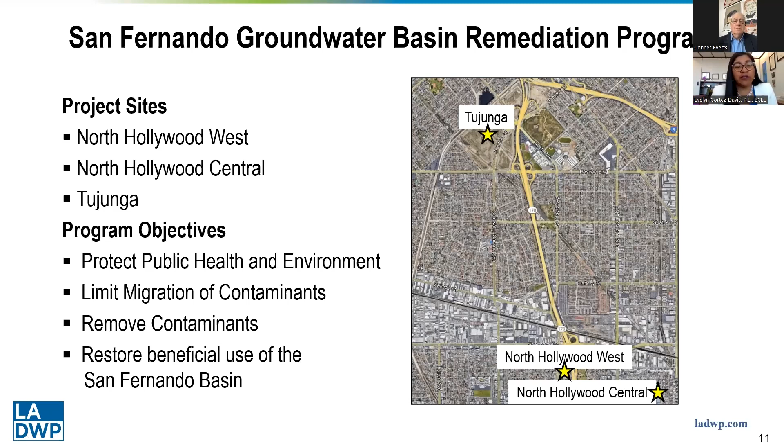But first, before we get going, talking really more about the program objectives in general. There are four. We want to protect public health and the environment, limit migration of contaminants, remove the contaminants from the basin, and what's driving really our program from LADWP's perspective first and foremost is to restore the beneficial use of the San Fernando Basin for the benefit of the city of Los Angeles.

So what are we doing and why is it important? Typically, groundwater has supplied about 10% of our water supply, but in times of severe dry periods, droughts, etc., groundwater has been able to supply up to 21% of our supply. We want to be able to restore this ability.

However, many of our groundwater wells have been, over the past few decades, removed from the ability to pump them reliably, which has been severely constrained because of contamination impacts. We have 115 total groundwater wells here. Just over a third of them can be pumped reliably.

So this is part of a larger strategy for the city of Los Angeles to be more locally reliable. In order for us to do this, groundwater is a key component of that. Recycled water, stormwater capture, and conservation, of course, make up the other pieces of the puzzle, but groundwater is a central cornerstone piece of our water supply strategy in general for the city of Los Angeles.

So we want to be able to restore this access to all the groundwater basins. We're going to be focusing on the San Fernando groundwater basin today, but we do have groundwater rights also in the Central Basin, the West Coast Basin, and a few other smaller basins as well. But the largest adjudication of water rights for us to be able to pump water into the city of Los Angeles system is from the San Fernando groundwater basin. That's what we are focusing on this program today.

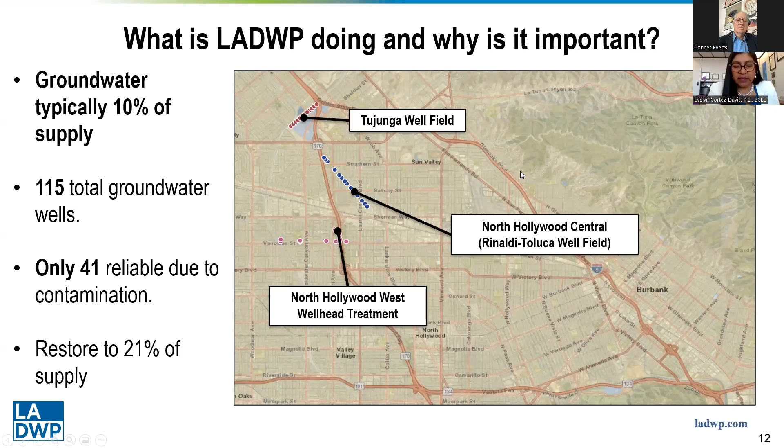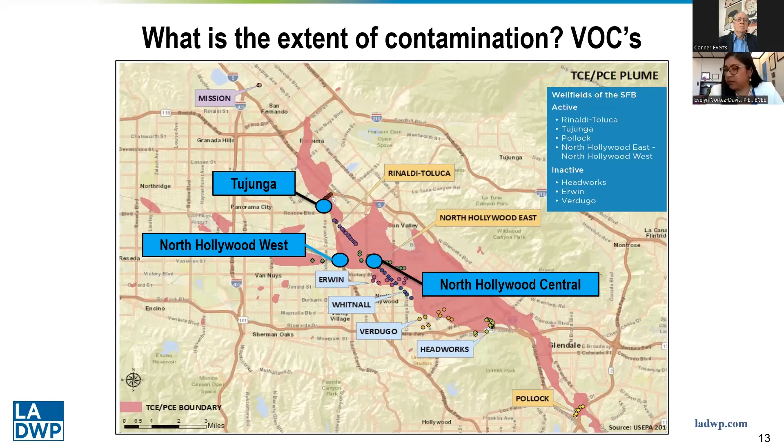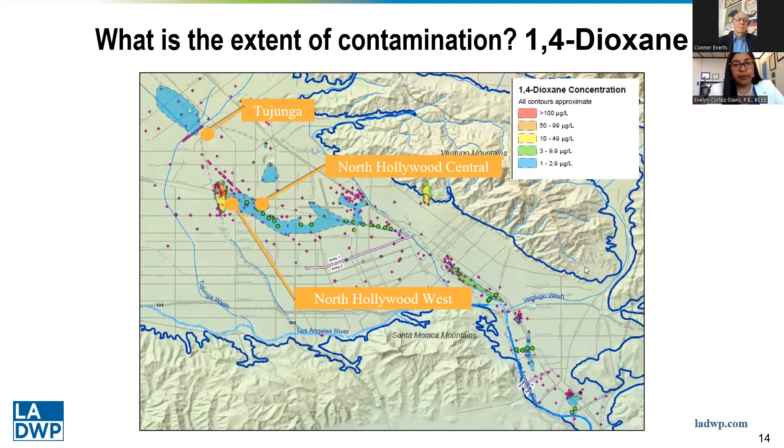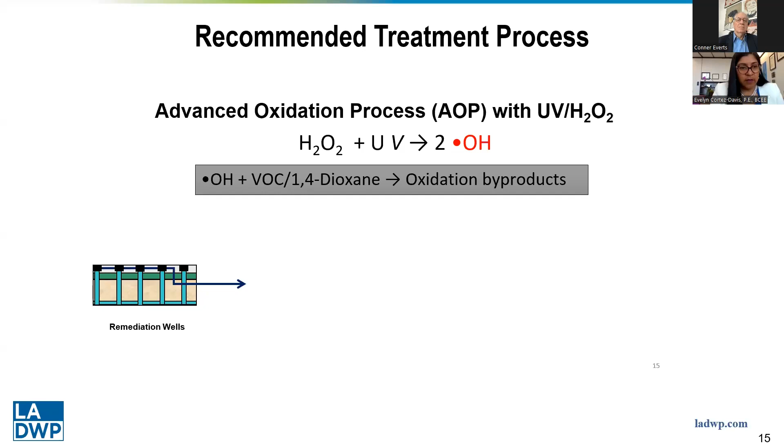Our recommended treatment process is advanced oxidation with ultraviolet light and hydrogen peroxide. I'll walk you through the different pieces here. Groundwater is pumped through the remediation wells and goes through two pre-treatment steps: sand separators and cartridge filters to remove sediment. After pre-treatment, peroxide is injected, and the water with peroxide is then passed through the ultraviolet advanced oxidation process. The ultraviolet light energizes hydroxyl radicals, which basically break apart the bonds in the molecules of the contaminants we're trying to treat.

After the ultraviolet light treatment, the water then goes through granular activated carbon vessels to remove any excess hydrogen peroxide. After that, we have traditional disinfection treatment in order to introduce the water into our distribution system. The GAC vessels do need to be flushed and backwashed every once in a while. When we do, we have a backwash waste tank, which is the next animation here. Thank you, Gary, for your help. The resulting water from the backwash system goes into the sewer.

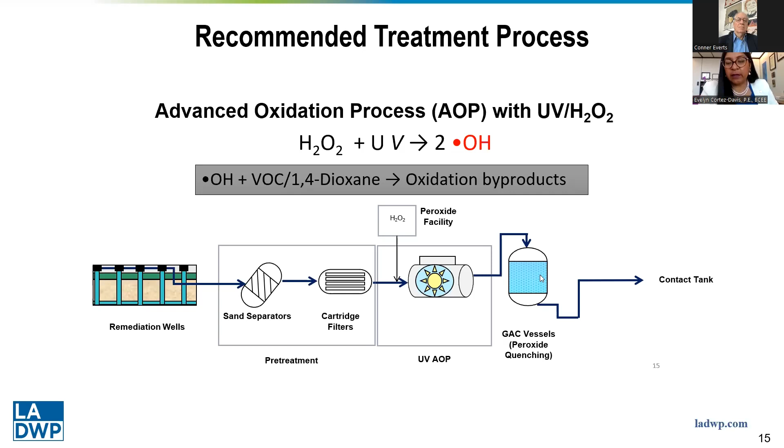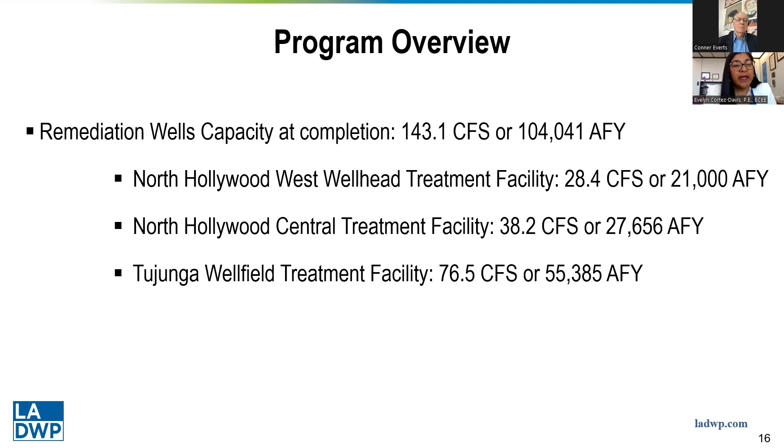All three facilities, as you'll see as I advance, have a similar layout. We'll walk through each one. The capacity of each facility is shown here. At completion, we expect the North Hollywood West treatment facility to have 28 cubic feet per second of capacity, roughly 21,000 acre feet per year. North Hollywood Central is the second largest, at 38 cubic feet per second capacity. And the Tujunga facility is the largest at 76 cubic feet per second.

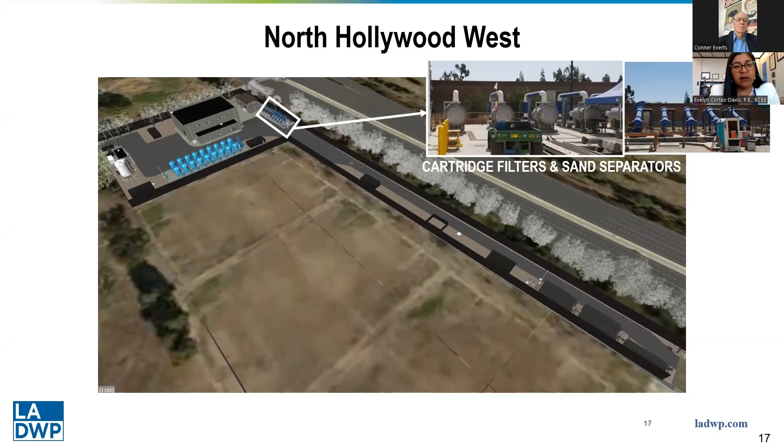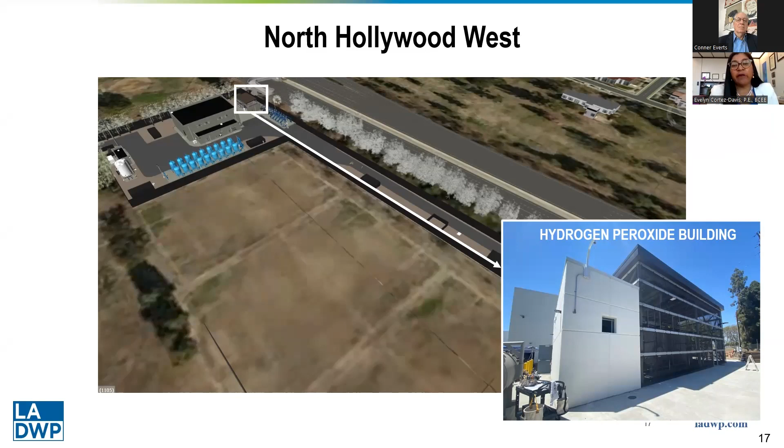The North Hollywood West facility has been constructed by our in-house construction forces and was designed by our owner's agent team, Hazen and Sawyer and Arcadis, also supported by Worley Parsons and other key team members. The facility treats 5 wells on site, adjacent to Whitsett Fields Park in the San Fernando Valley next to the 170 freeway. The water flows as shown in the schematic earlier, first through pretreatment, then through hydrogen peroxide injection, and then through the ultraviolet advanced oxidation process.

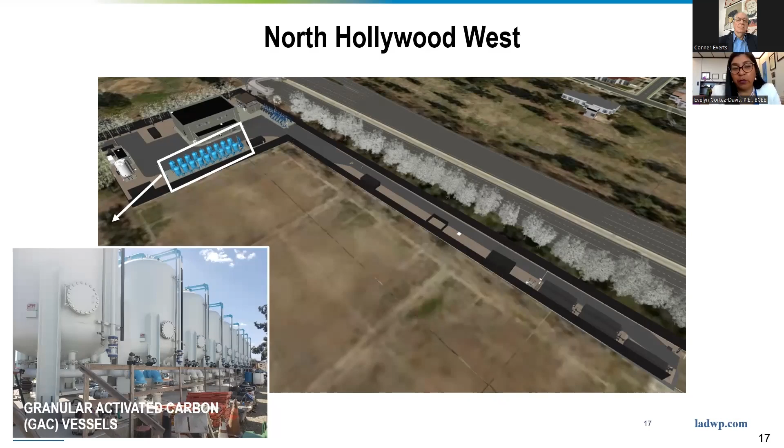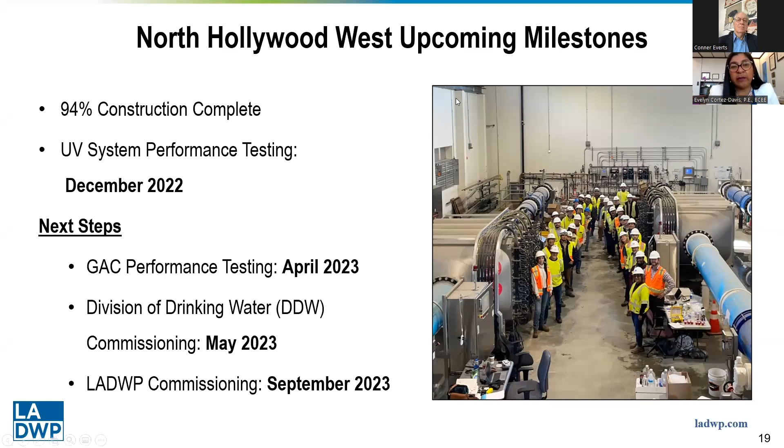We're going to be pumping 3 of the remediation wells in order to focus the plume into the area where we're treating it. After the first 2 years, we expect to treat nearly 21,000 acre feet with an additional 2 wells coming online. The North Hollywood West project is just about 95% complete, a little over 94. The UV system performance testing was done in December. We are doing performance testing soon for the GAC system, the granular activated carbon, and then our commissioning process for the Division of Drinking Water will be starting later this spring, with our DWP commissioning process going in the fall of this year.

To go over the North Hollywood Central Treatment Facility, we again have a similar process for the water. We have strainers for pre-treatment and then an injection of peroxide dosing, and you can see the storage there, some pretty large storage containers for our hydrogen peroxide. Then the water will flow through the UV reactors in the AOP building, and then through the granular activated carbon to remove excess peroxide.

Then there's ammonia and fluoridation that's taking place also on site. The reactors at this facility are some of the largest of their kind, 384 UV lamps per reactor, and we have 5 reactors at this facility. So it's a fairly extensive system that we have at the North Hollywood Central Treatment Facility.

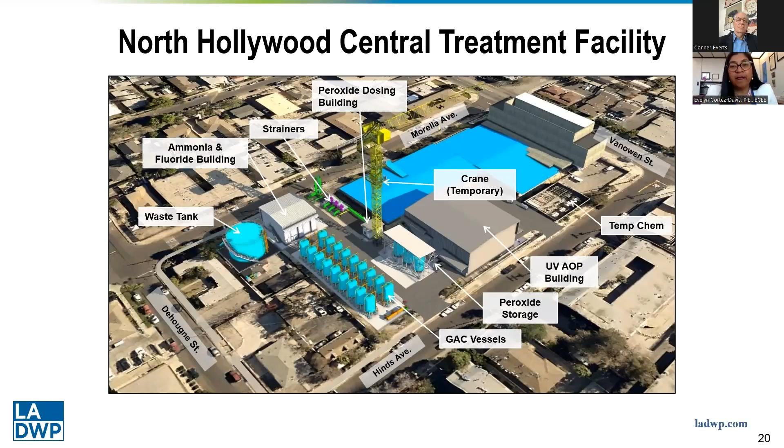This is an aerial photo of what the facility looks like. In contrast to our North Hollywood West, as you can tell, it's an extremely high density residential area. These are multifamily homes around the perimeter of the facility. So it has constraints that some of the other sites do not, and it has challenged our engineering and construction teams to do a lot in a smaller footprint where we don't have as much room to go.

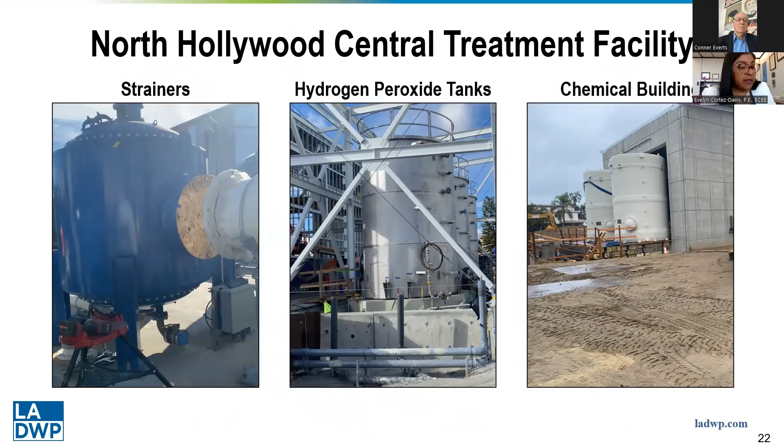But all of the components have been successfully put in, and this facility is making extremely good progress toward completion later this year. What you would see if you were standing on the ground here are the self-cleaning strainers used to remove larger particles, sediment, and debris from the extraction of the groundwater. Then we have the 3 hydrogen peroxide tanks, each 13,000 gallons, and the chemical building that will store ammonia and fluoride for disinfection after the water has gone through the groundwater treatment process.

Upcoming milestones: the construction will be complete. We are targeting to finish construction later this year. We're about 90% now, 89%. Next steps will be performance testing and the commissioning process in the spring with DDW, and our DWP commissioning process for the latter part of this year.

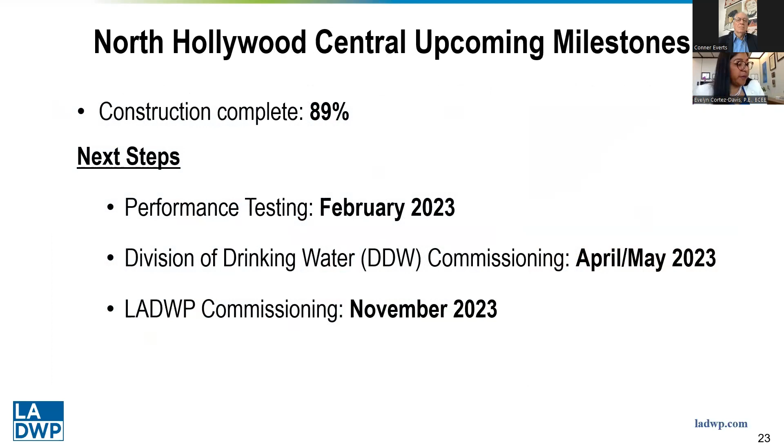For the Tujunga Wellfield Treatment Facility, we have a number of existing facilities that we needed to work around, but a little bit larger footprint for this facility. This treatment facility will treat water from 9 out of the 12 wells at the Tujunga Wellfield, which is located at the same location. Water from wells 6 to 12 will go through the pre-treatment and peroxide dosing like the other facilities.

Then go through the UV reactors as well, and through the granular activated carbon for removal of excess peroxide. There are 2 wells here that will only go through granular activated carbon, and the reason is that they are not affected by the 1,4-dioxane plume that does affect this particular area.

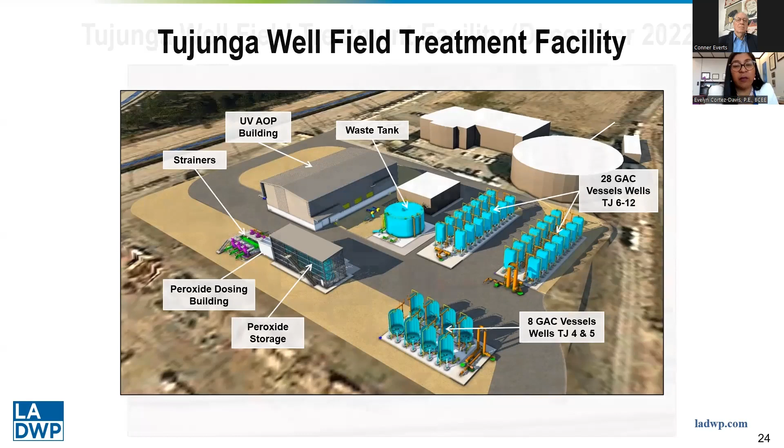I did not mention for North Hollywood West that the controlling contaminant is 1,4-dioxane. For this facility, the controlling contaminants are VOCs, PCE and TCE. So here's an aerial photo showing the progress, and it's a fairly large construction site.

We are adjacent to the Tujunga spreading ground. If you've been to the Tujunga area, you may have noticed that recently they have had water in there. It's a very critical facility for us because it plays a number of different roles.

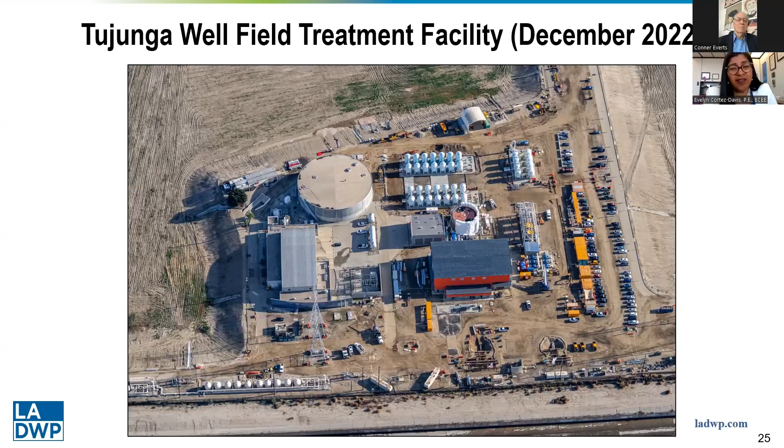It is a wellfield. It is a functioning stormwater spreading basin. It is a pumping station into the distribution system, and now, as of the completion of this project, it will also be a groundwater treatment facility. So 4 critical roles, and we'll be able to restore some of the access to the wells that have been affected by contamination.

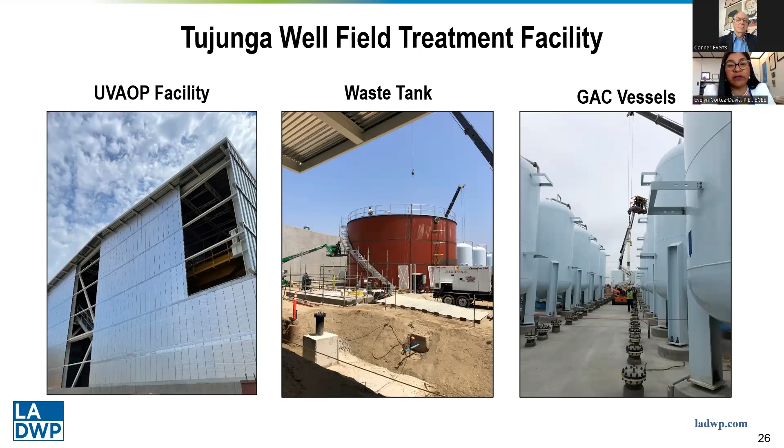So program schedule - we have been working on this program for quite some time. The owner's agent contract, in fact, we awarded back in 2015, and Hazen and Sawyer was brought on board to help us as our expert. North Hollywood West construction is being completed by our in-house construction team. DWP started in September of 2017.

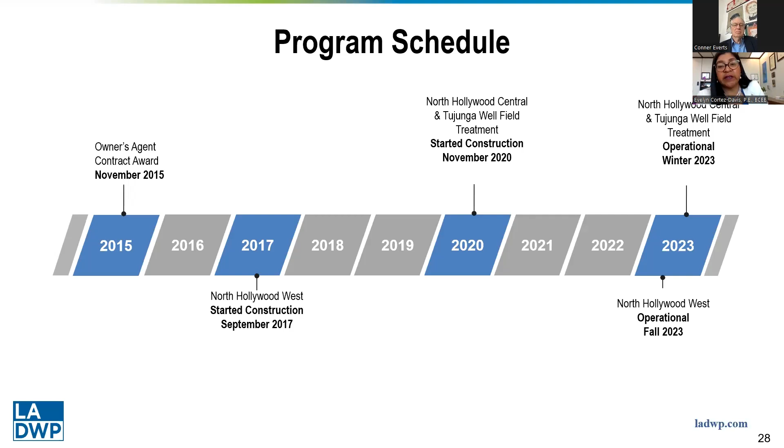The North Hollywood Central and Tujunga Wellfield project began construction in November 2020, but that team was brought on board sooner so they could start the design build process. It was being delivered through a progressive design build process, and the team helping us is Kiewit as the construction contractor, and Stantec as our design consultant. For North Hollywood Central and Tujunga Wellfield, we are targeting to be operational this winter, and fall of 2023 for North Hollywood West.

Let's talk about money, because none of this is free. The program cost is significant. Totaling all three facilities, the cost is $640 million, and $308 million is the Prop 1 grant funding secured for this program. So far, we have already been reimbursed $74 million.

The importance of the Prop 1 funding cannot be overstated. Every dollar secured through Prop 1 will offset ratepayer investment. Anything else not covered by Prop 1, our intent is to make sure we are proceeding forward in a way that preserves our ability to recover costs from potentially responsible parties in the future.

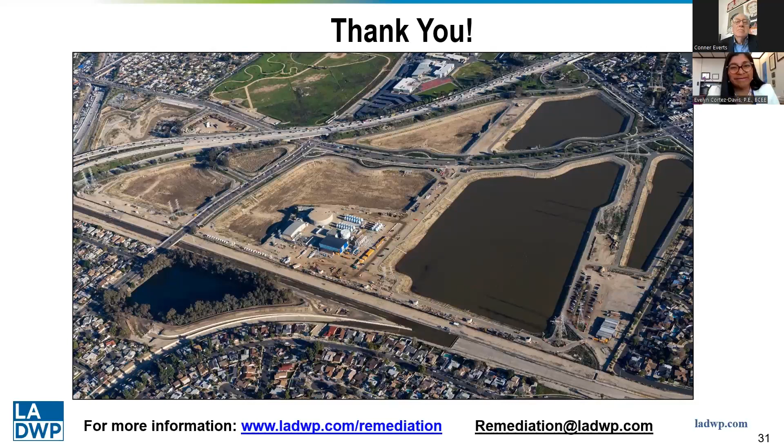Thank you, Evelyn. I'm sure that's already brought up some questions, and thank you for all of the updates and information. I know it's a long-running project. So next we have Rob Katherman from the Water Replenishment District. Take it away, Rob. Yeah, Conner, thank you. And Evelyn, great job - it's really nice to see young women involved in engineering projects. We've worked with you for the last several years on our Hyperion planning, and it's been a real pleasure.

Water Replenishment District - we manage groundwater for 420 square miles. We have utilized reclaimed water for replenishment. Two years after we started, today nearly all of our replenishment is basically reclaimed sewage. So our motto is: the future of groundwater is purified poop water. Let's go next.

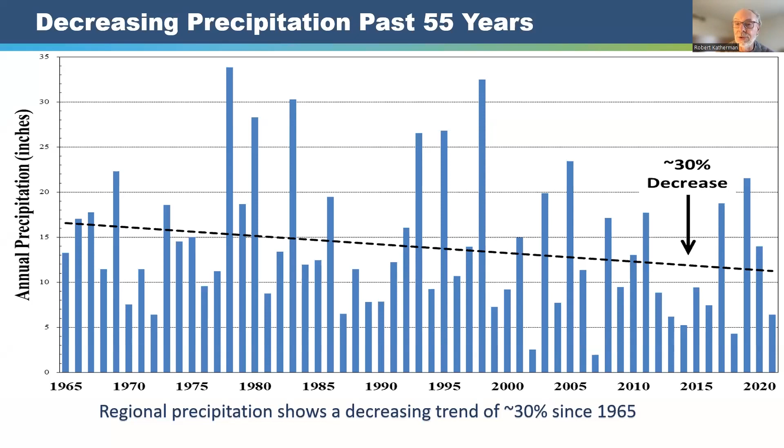Climate change - we've all heard about it. We recognized the effect of climate change over 50 years ago, and in particular 20 years ago. Metropolitan produced this slide showing we have had a 30% reduction of precipitation here in our basins over the last half century. So, new rules.

Climate change was causing drought as our new normal. We've had the driest 20 years in the last 1,000 years, as you all know. So the short-term solution is water conservation, something we can all do on a daily basis. Long term, purified poop water from local sources.

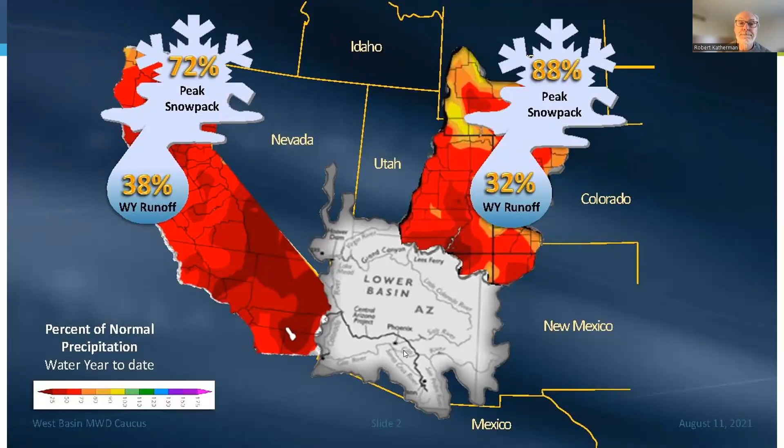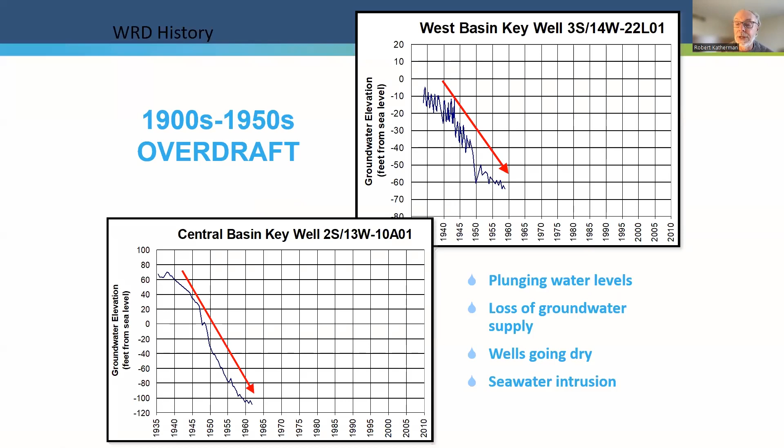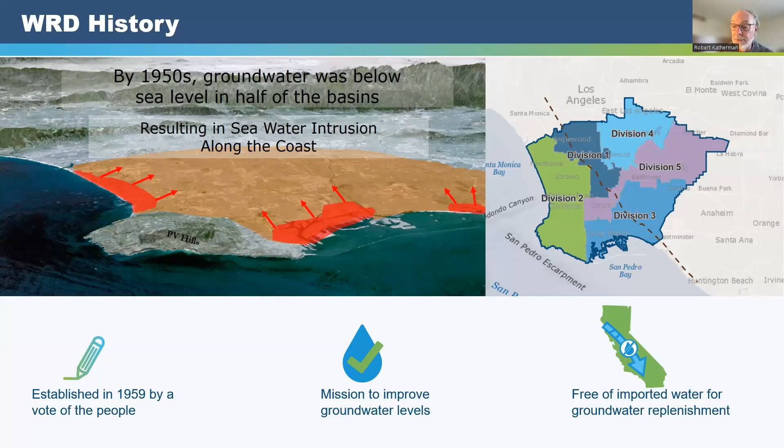So WRD was established in 1959 by a vote of the people to pay for replenishment water, which was originally 100% imported water. So back after World War II, the leaders in the South Bay decided we need to do something about this seawater intrusion. First was to create the West Basin Municipal Water District by a vote to tax themselves, almost 13%, believe it or not, to be able to buy imported water to supplement groundwater.

Next, we filed a judgment to cap the amount of pumping that was concluded after almost a decade of litigation, and cap pumping at a little over 280,000 acre feet. That is more than the basin can replenish. That is about 100% more than the safe yield of the basin. So how do you make up that other 50% of the water that's being pumped? So that's where WRD came into being.

In order to combat the seawater intrusion, the County Flood Control built 16 miles of injection wells along the West Coast to inject imported fresh water to stop seawater intrusion, and about 70% of that water ends up migrating inland to replenish the West Basin. Subsequently, they built the seawater barriers along the two ports, what we call the Dominguez Gap barrier, and then on the east part of Long Beach and west part of Orange County for the Alamitos barrier. So as I said, WRD was formed in 1959, again by a vote, to replenish our aquifers and to protect groundwater quality.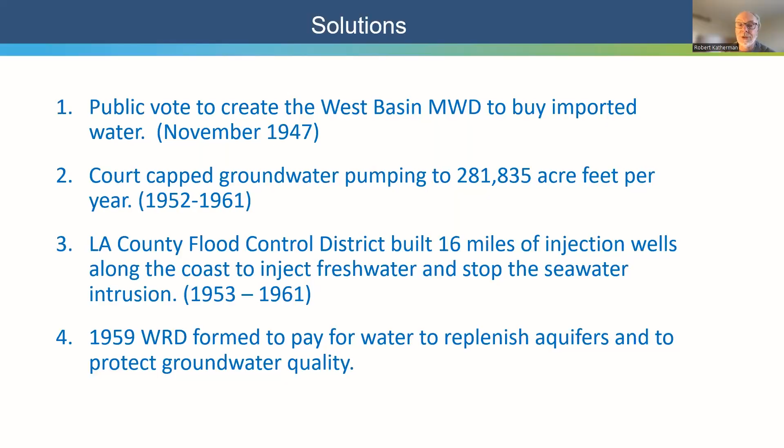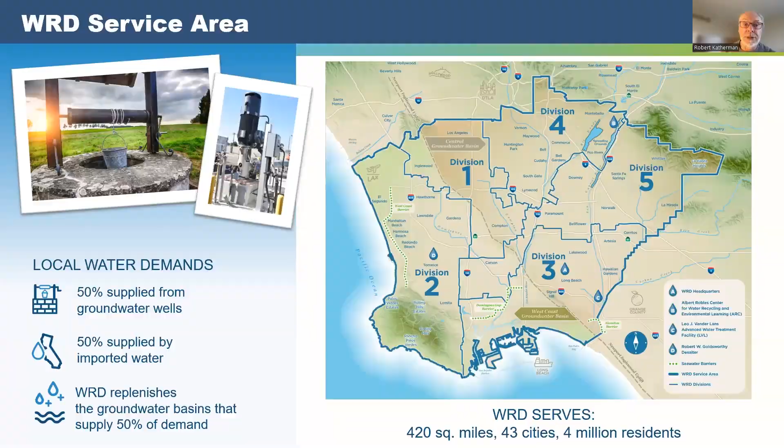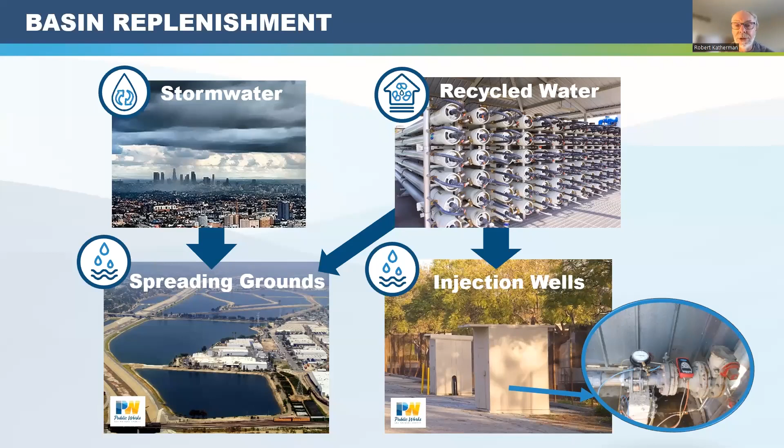So our sources of water: stormwater capture and recycled water into the spreading grounds, and now recycled water into injection wells at our three barriers. And we have just built our first inland injection well over in Long Beach. We'll be using water from our Vander Lans Advanced Treated Water Plant.

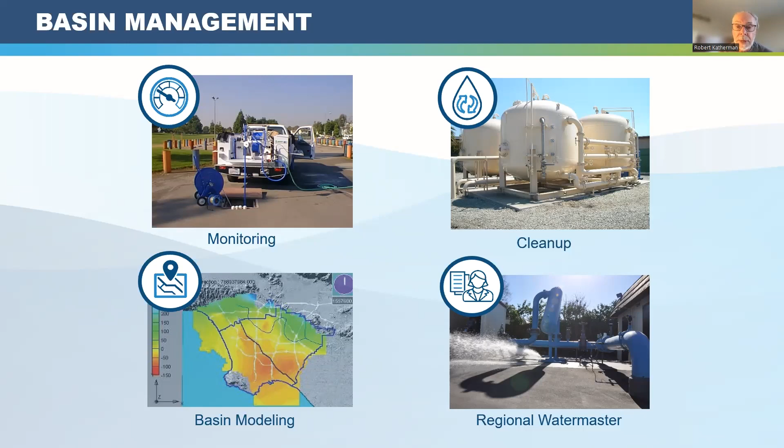So our job to manage the basin, of course, is to monitor groundwater and to check for chemicals. So we test for over 200 chemicals now in all of our wells, and we have 300 locations throughout the basin. And in our basins, we are more fortunate than the San Fernando Valley. The valley, as is the San Gabriel Valley, are basically big sand pits. So whatever contamination enters at the surface goes directly into the aquifer. We have layers of aquifer interspersed with clay, aquitards they call them, where the water from the surface cannot percolate directly into the aquifer. And I'll show you that in a minute. We'll move on.

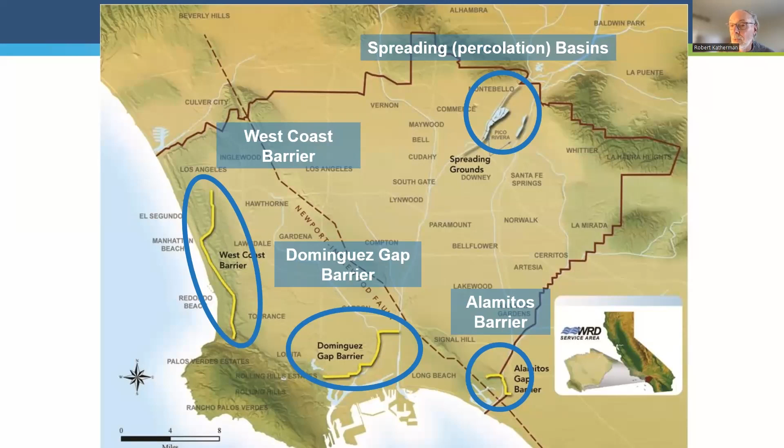Yeah, so our three sources of replenishment are the barriers, West Coast, Dominguez Gap, and Alamitos. We provide about 30,000 acre feet of water into those barriers, but the majority of our water is spread in the percolation basins, which are the San Gabriel and Rio Hondo rivers as they come through the San Gabriel Mountains, and at Montebello, 605 and 60 freeway, if you can visualize that. Over 100,000 acre feet is produced there. Half of that is normally stormwater. The other half, when we started, was all imported water. Today, that's all reclaimed water from the county sanitation district plant.

2004, fast forward, as the district had worked over the years to gradually reduce imported water and increase recycled water and capture stormwater. We said we recognize the effects of seawater intrusion and climate change as threatening our basin. So we said we need to start pushing this quicker. And so we started the Water Independence Now to eliminate our need for imported water.

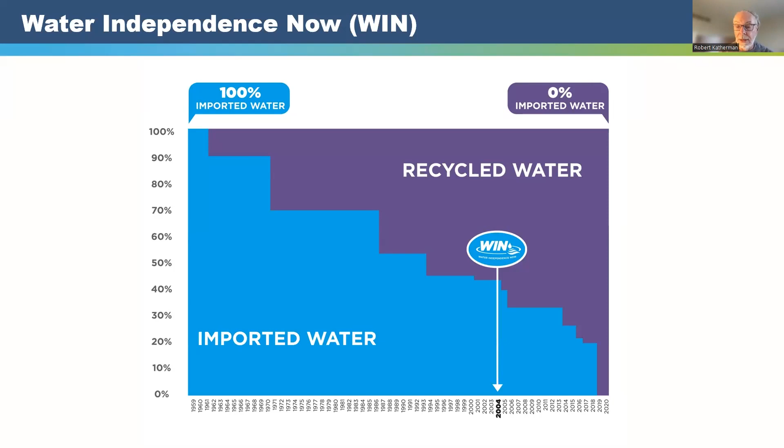And that was completed in 2019 with the completion of our advanced water treatment plant in Pico Rivera, which allows us to take the last 20,000 acre feet of water for spreading and now makes us completely free of imported water. We no longer purchase from the Central Basin Municipal Water District, allowing that water to be used elsewhere in the metropolitan service area. Next slide.

So what do we do now for an encore? We've been working with the LA Department of Water and Power to plan utilization of their treated Hyperion water when that project is completed, and more immediately with the Metropolitan Water District to provide treated water for first injection into the West Coast and Central Basin, and then ultimately spreading up in our spreading grounds. And then finally, the water will be pushed up to the San Gabriel Valley and then further east from there.

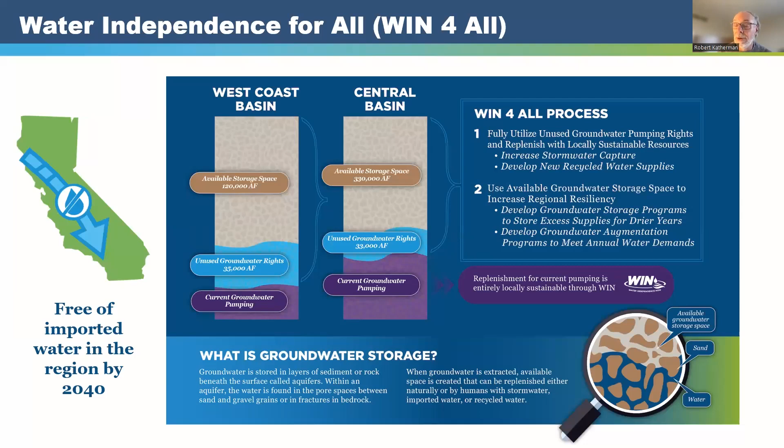So we're going to develop storage projects utilizing that almost 500,000 acre feet and augmentation projects. And an augmentation project simply means that you use the water each year that you put in. Storage can be put in and utilized over subsequent years moving forward. So between the two of them, we are hoping that in the next decade and a half we will be completely free of imported water for our use in this groundwater basin. Next.

It will provide water to service the brackish water reclamation program. Once we pull the brackish water out of the ground, we've got about 200,000 acre feet of brackish water, which is salty water, not nearly as salty as ocean water, but too salty to drink. Ocean water is 30 to 35,000 parts per million of dissolved solids. The brackish water in the West Basin is 500 to 5,000 parts per million. So we're using advanced treated water technology, which is basically ocean desal technology, reverse osmosis, microfiltration to treat that water.

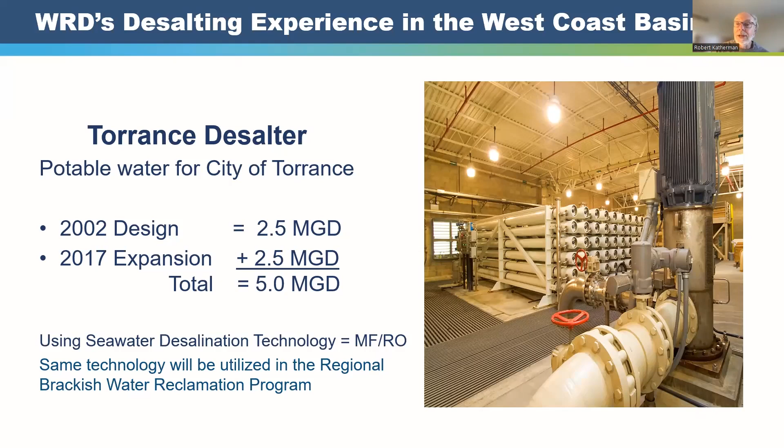We'll clean up the groundwater aquifer to allow it to be utilized to its fullest extent for its annual pumping allocation, and then ultimately for groundwater storage and augmentation in the basin, taking advantage of the 200,000 acre feet of storage capacity in addition to the existing unused storage of 130,000 acre feet. So this is going to be a tremendous benefit to future generations. Next slide.

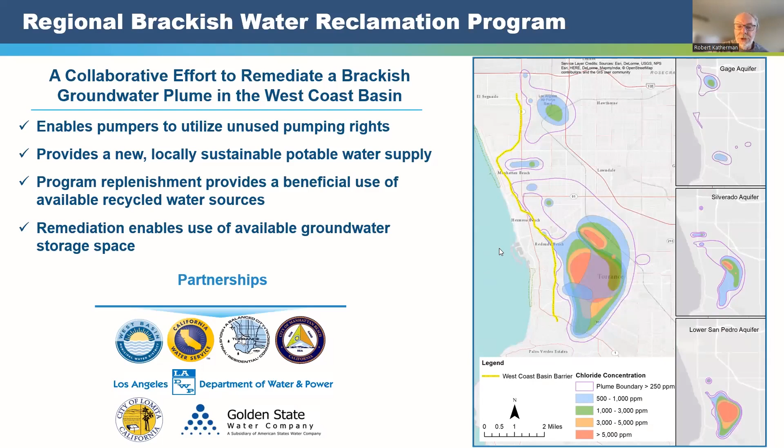And I want to thank you. One thing I would like to say that's actually not in the slide presentation, that we have been doing groundwater cleanup projects since 1994. We also have a lot of VOC contamination in the groundwater, but because of the aquitards and basically the layering of aquifer and aquitards, it's been confined to the northerly part of our basins, primarily in Central Basin.

West Basin is what they call a pressure zone, where you have aquitard at the surface. So the water cannot percolate from the surface, and the contaminants therefore cannot percolate from the surface. So we have been cleaning up water since 1994, and we spent $30 million or more doing it.

Most recently, we have a Vernon perchlorate system, which is $7.5 million that we got from Prop 1 money, and we have just begun that perchlorate cleanup. Next, of course, is PFAS, which we're all aware of.

We have been funding wellhead treatment projects for our Central Basin pumpers surrounding the Montebello forebay area and the Rio Hondo and San Gabriel rivers, where water has been percolated into the aquifer there. That water course contained PFAS contamination.